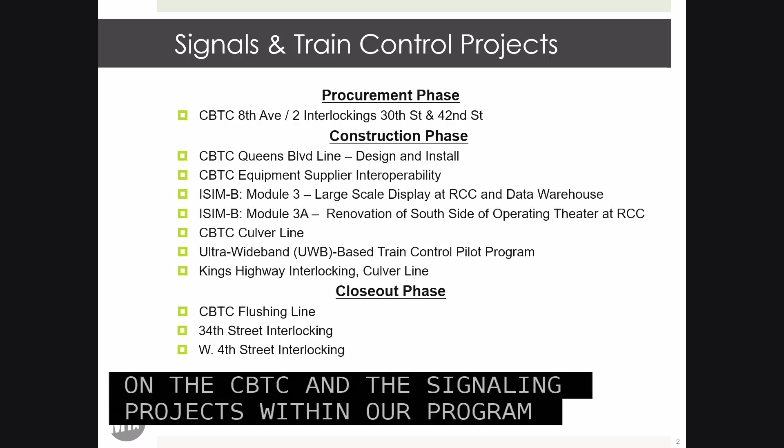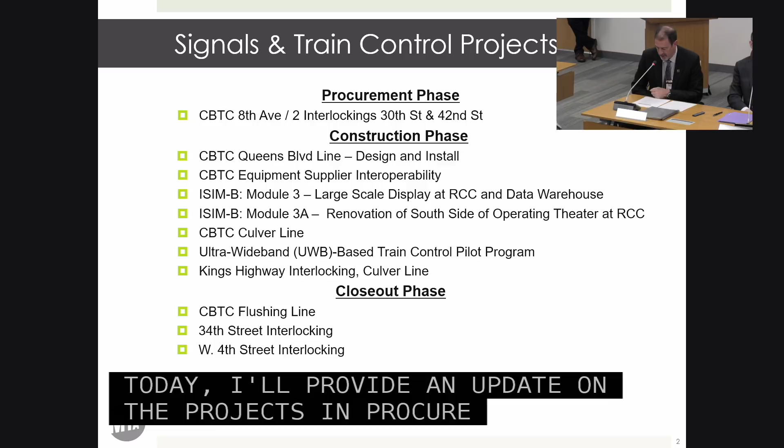Overall, we have 7 projects in design, 1 in procurement, 13 in construction, and 5 in closeout. Today I will provide an update on the project in procurement and 7 of the key projects in construction. Also an update on the Flushing line, which is now in the closeout phase.

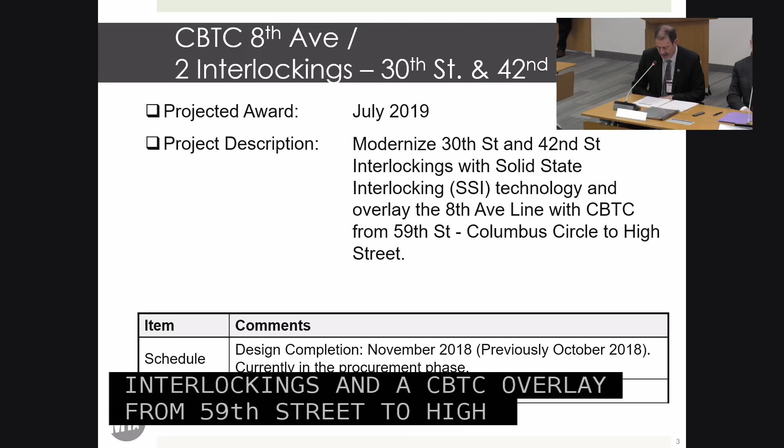The 8th Avenue contract is currently on the street with bids due in mid-July. The award is now targeted at August of 2019, and the completion date of this project is August of 2024. It consists of renewing 2 interlockings and a CBTC overlay from 59th Street to High Street. That's 6.5 route miles or 26.5 track miles, and 270 train units will also be equipped. This project is part of the Fast Forward plan and the first NYCT project that will use axle counters instead of track circuits.

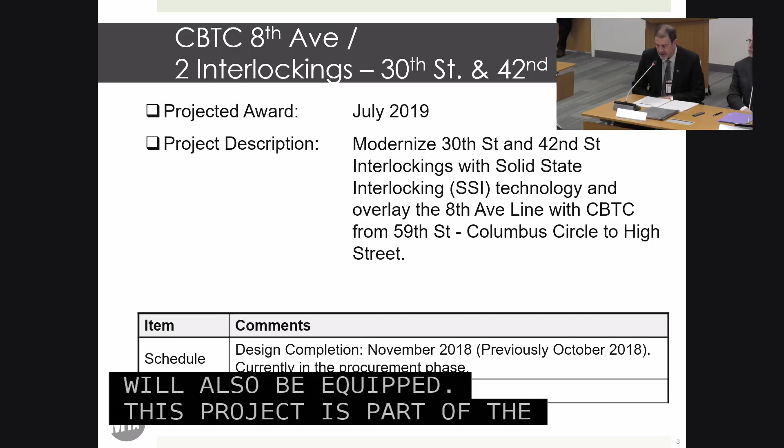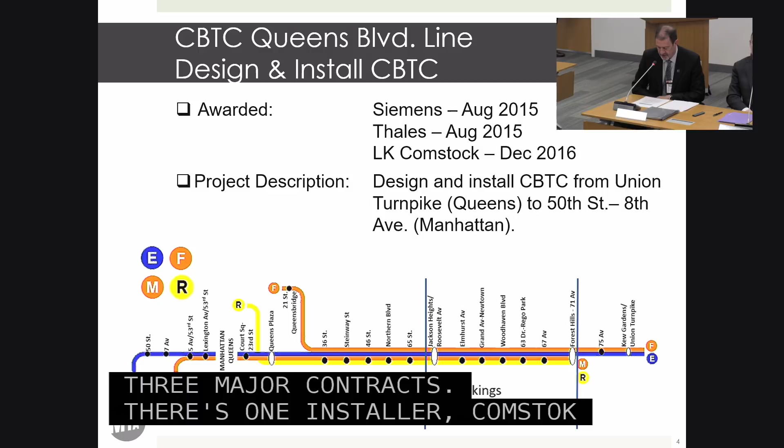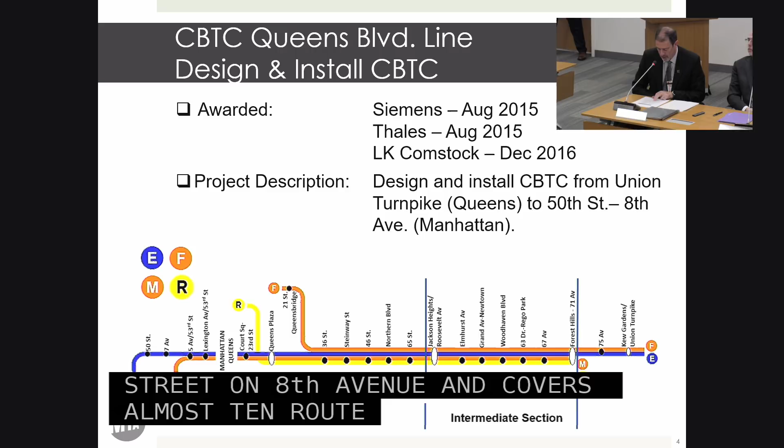Moving into the projects in construction, the Queens Boulevard line. This project is made up of 3 major contracts with 1 installer, Comstock, and 2 CBTC suppliers, Siemens and Thales, with Siemens being awarded 95% and Thales 5% of the CBTC portion. Geographically, the project runs from Union Turnpike to 50th Street on 8th Avenue and covers almost 10 route miles. It will effectively be put into service in 4 sections, with the intermediate section being first. That's shown on the drawing by the vertical lines in March of 2020.

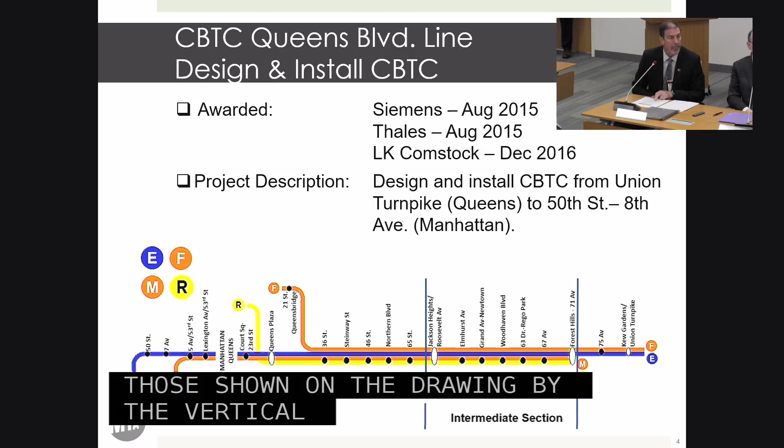Pete, Mr. Chairman, I think I may have made this comment before, but to make this map more geographically accurate, 50th Street should be after the curve, not before the curve on that map. Well, I will fix that next time. Thank you. Okay.

Hey, Pete, can you just tell the members of the board that are here and the public why two vendors on this project? Why both Siemens and Thales? Could you just spend a minute on that, if you would? Yeah, so because the network is so large, we need more than one signaling supplier. And to do that, their equipment has to work with each other's equipment. So we need a train that runs on any line to be able to work with different suppliers' equipment.

So this project is the first fully interoperable I2S project for NYCT, because Flushing was all Thales and Canarsie was all Siemens.

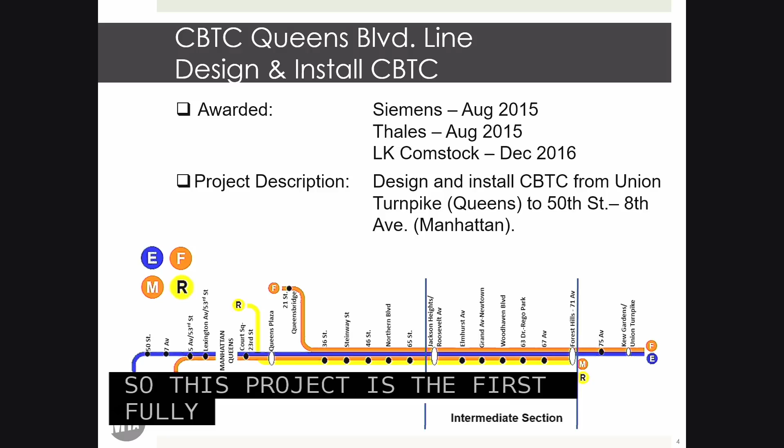So installation in recent months has accelerated significantly and now stands at 95% for the intermediate section and 37% for the full project, with all cables having been run for the entire project. The CBTC elements are at 58% complete.

The original completion dates are being aggressively targeted, but there is still a significant risk to both budget and schedule. We estimate that exposure to be in the region of 3 to 6 months.

The risk originated in 2017 with the interlocking projects utilizing every weekend and preventing the CBTC work piggybacking outages. TA labour resources were also severely limited, and a lot of flagging was required that wasn't available.

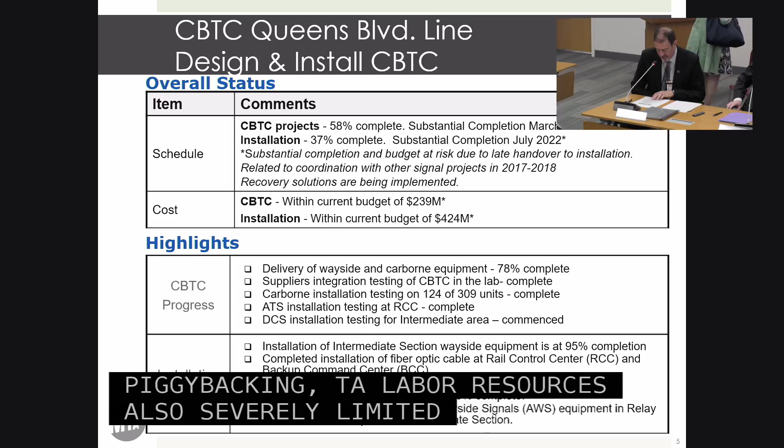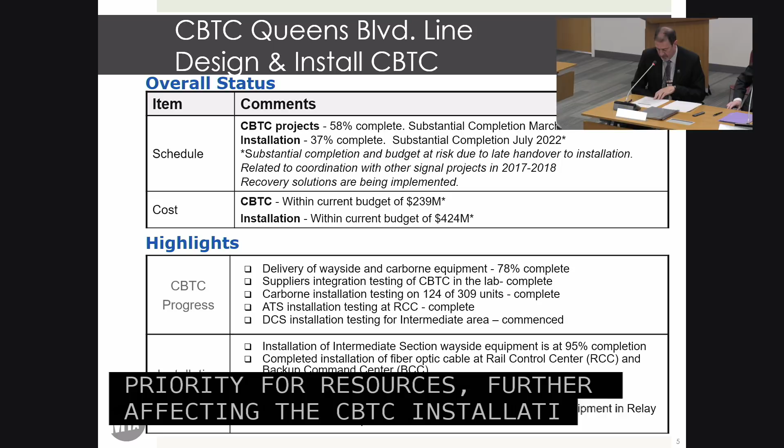The net result is that the intermediate section in service has moved out 6 months due to access conflicts, but as stated previously, many opportunities are being aggressively pursued to ensure that the other milestones are not affected.

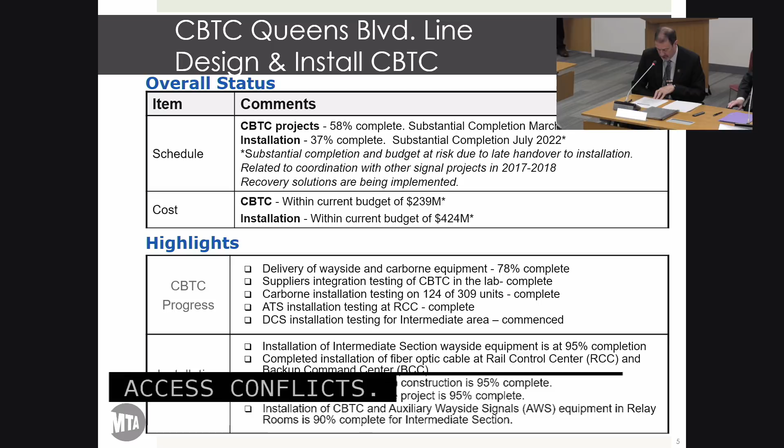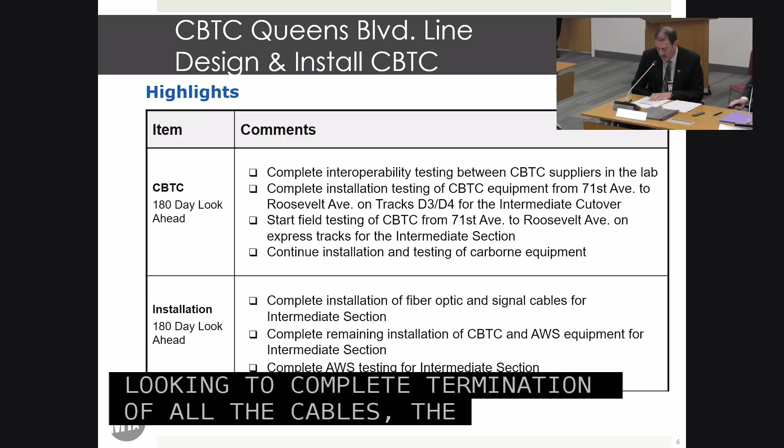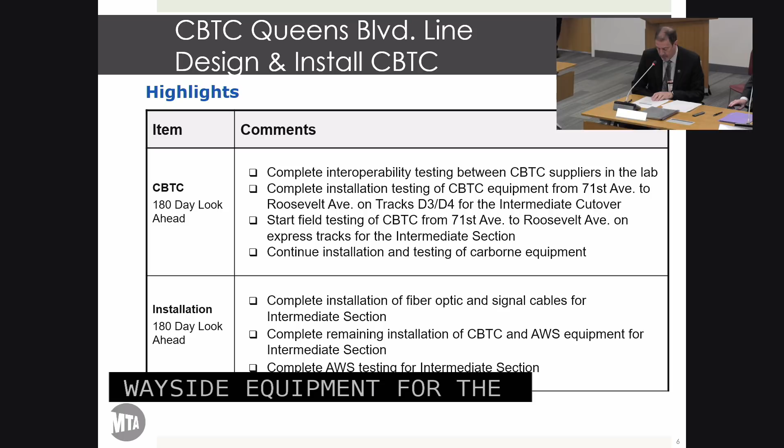In the next 6 months, we're looking to complete the termination of all the cables, the fibre, the auxiliary wayside equipment, and install the auxiliary wayside equipment for the intermediate section. In addition, field testing of CBTC for the intermediate section will get seriously underway, particularly with the DCS network, that will help prove all the trains, deal with the teething issues, and start to mature the fleet. We want to ensure there's high reliability from day one.

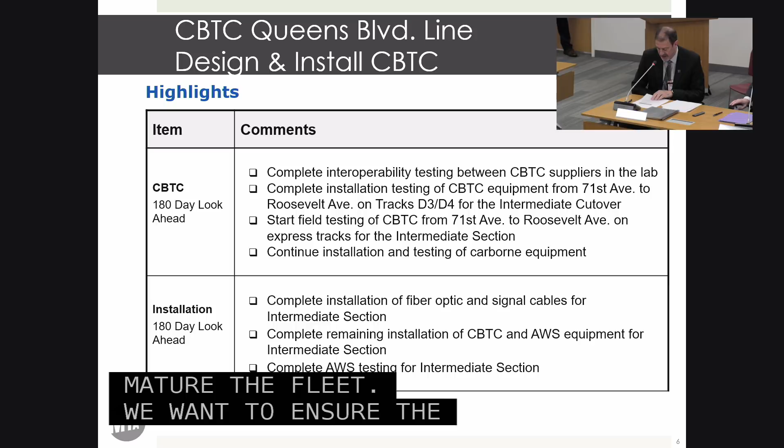Enough trains are already fitted out for the intermediate section, and work continues on the remainder.

CBTC I2S is a specification that suppliers have to adhere to, to make sure their equipment works with other suppliers' equipment. That testing on QBL is being completed between Siemens and Thales in April of this year. The training simulator arrived this month, in support of operator training, and that starts in September of this year. The software and the training materials are in progress.

All trains for the QBL line will be finished in June 2020, and as stated previously, the intermediate section trains are already available. I will say again that substantial completion is at risk due to those early delays, but the schedule with GOs, or the access, has been resolved. The schedule still remains very tight indeed.

Pete, can you quantify the schedule risk in months, please? I would say it's 3 to 6 months, but we do have opportunities that we're exploring, and we have significant commitments from all the major suppliers to come in on time. We've got a plan. President Byford has met with all the senior staff from the key players, and we're working through those opportunities.

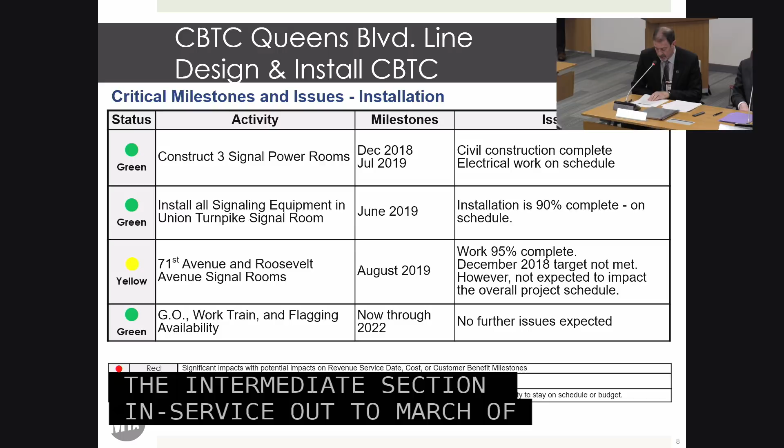Moving on to the qualification of the third supplier, Mitsubishi. Since September 2015, Mitsubishi have been developing and testing their new CBTC solution to become the third supplier to New York City for interoperable CBTC solutions. Once safety certified, they will be able to bid on contracts along with Siemens and Thales, thus providing more options and competition.

Pete, can we just stop there for a second? We've heard lots of discussion, appropriate discussion at meetings this month and in prior months about how in so many areas there's a duopoly of suppliers. Can you talk about the importance of qualifying Mitsubishi and the positive effects that may have going forward?

It's a very significant thing that we have to do, to get a third supplier qualified. We're also talking to a fourth supplier. Because the system is so large, there's no one supplier that can really handle the whole network, so we need multiple suppliers, and they need to work with each other. So it's very significant that we get Mitsubishi qualified. And all other things being equal, more competitors ought to result in more competitive pricing and terms. That's correct. And also an evening out of the workload, because it's quite a significant undertaking, even with two suppliers.

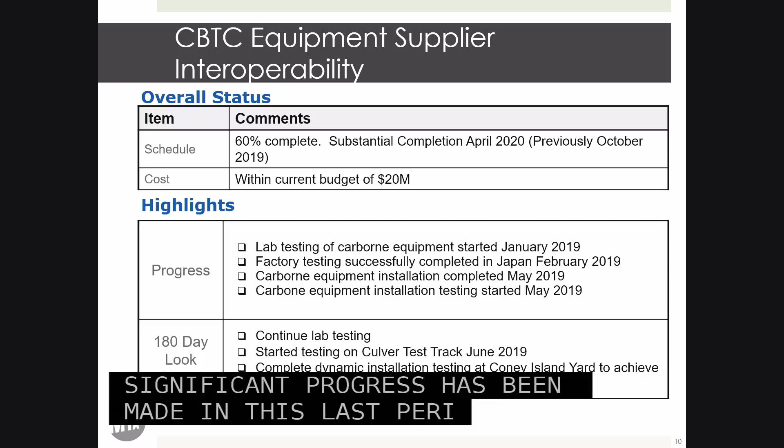This project started and was progressing slowly. However, substantial and significant progress has been made in this last period. The lab testing, the factory acceptance testing in Japan, and static testing of the carborne installation have all been completed since the end of last year. At Coney Island, a train has been run in both ATPM mode and automatic train operation. That is a very significant achievement.

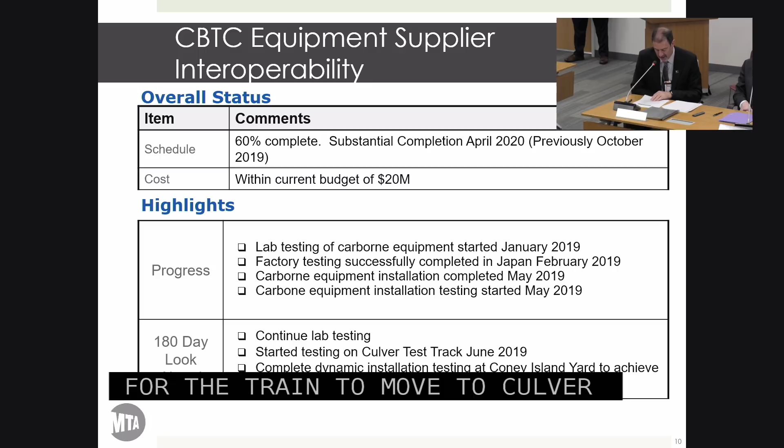Preparations are well underway for the train to move to Culver Test Track and for Mitsubishi to start interoperable tests with Siemens. In parallel, in the lab, Mitsubishi have completed integration tests and are now working through a suite of interoperable tests with the Siemens solution in a dedicated session over the next 3 weeks.

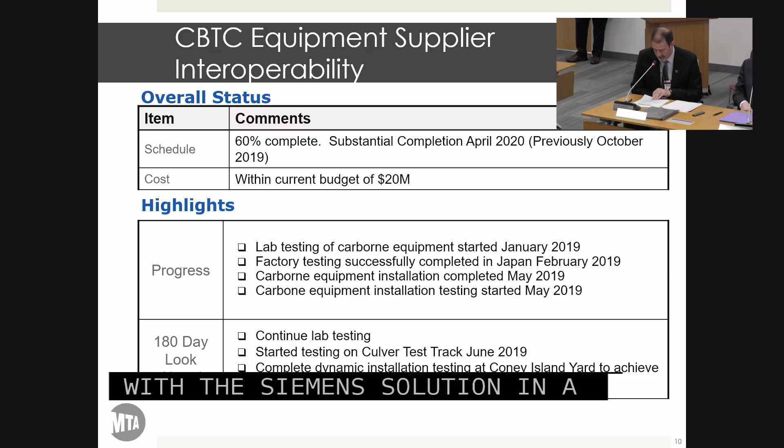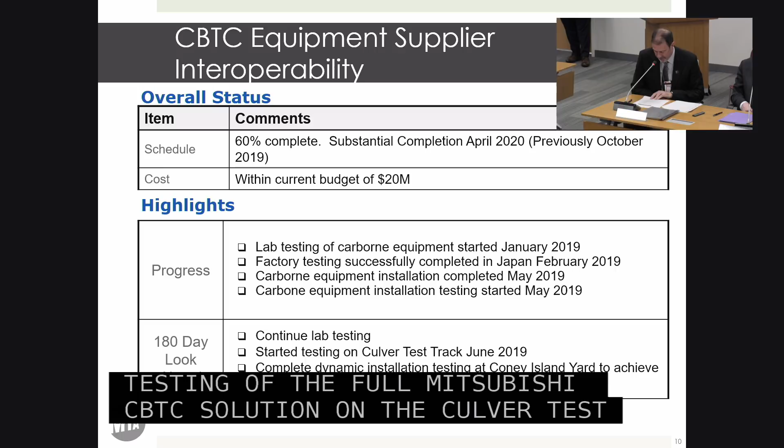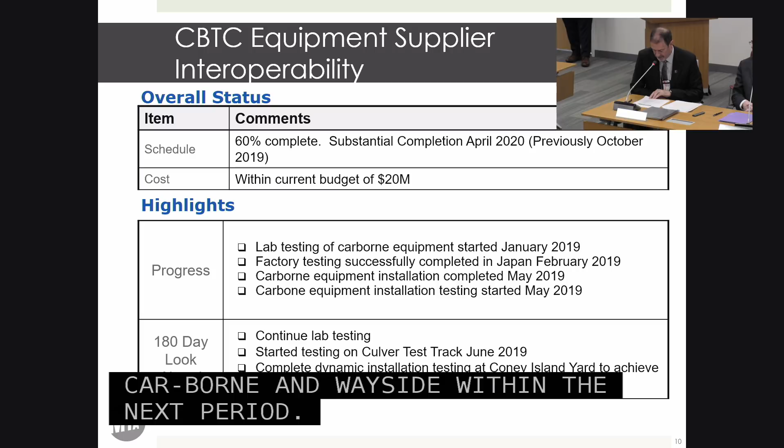The next 6 months will see the system testing in the lab complete, as well as dynamic testing of the full Mitsubishi CBTC solution on the Culver Test Track. This will allow pre-qualification of Mitsubishi carborne and wayside within the next period. Once they're pre-qualified, they'll be able to bid, and full safety certification will come early next year.

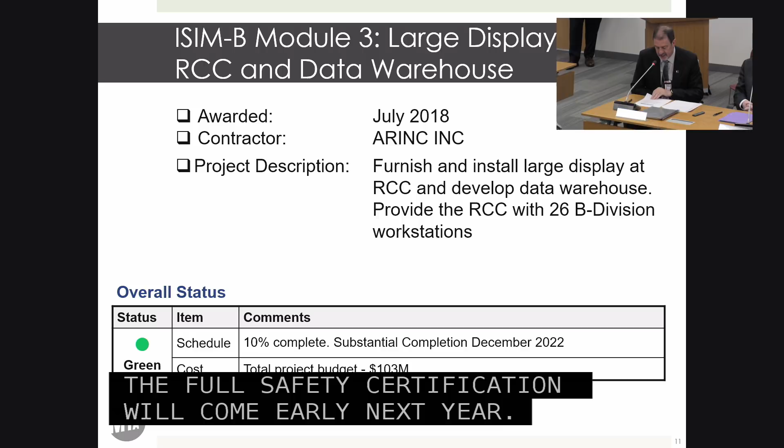The ISIM-B Module 3 project was awarded to ARINC in July 2018 and will see the installation of a large display, a data warehouse, and 26 B Division workstations in the RCC. This project is 10% complete, on schedule and on budget, with no significant issues.

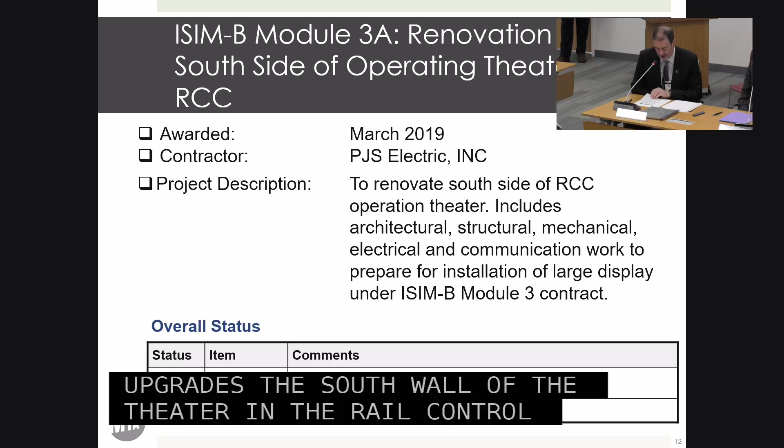Now to the ISIM-B Module 3A. This is a complementary project to Module 3, and it upgrades the south wall of the theatre in the Rail Control Centre. This project has just started, and there are no issues with scope, schedule, or budget.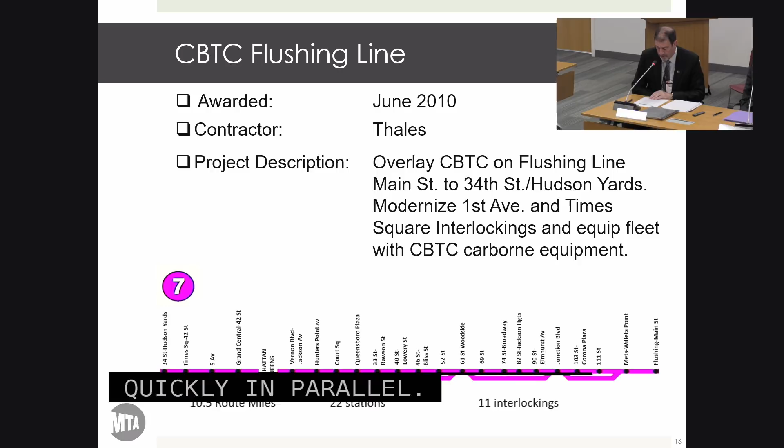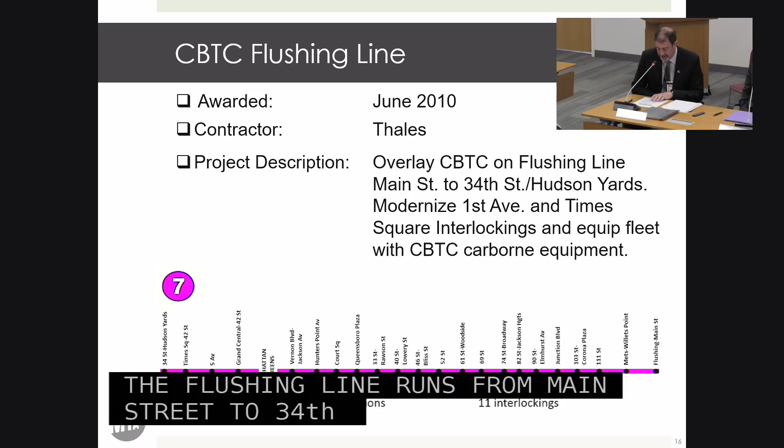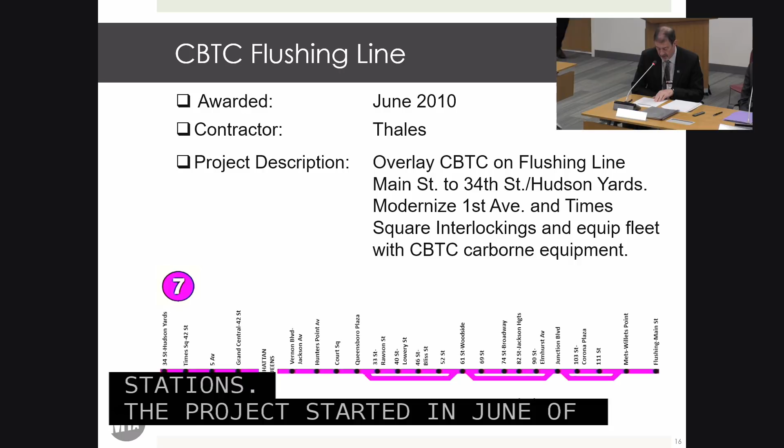Onto the Flushing Line, which is now in closeout. The Flushing Line runs from Main Street to 34th Street Hudson Yard, about 10.5 route miles, 18.5 track miles, and 22 stations. The project started in June 2010, with substantial completion in March 2019. There were many challenges, setbacks, and delays along the way. However, Flushing has now had 24/7 ATO operation available since early May, and the system is performing very reliably.

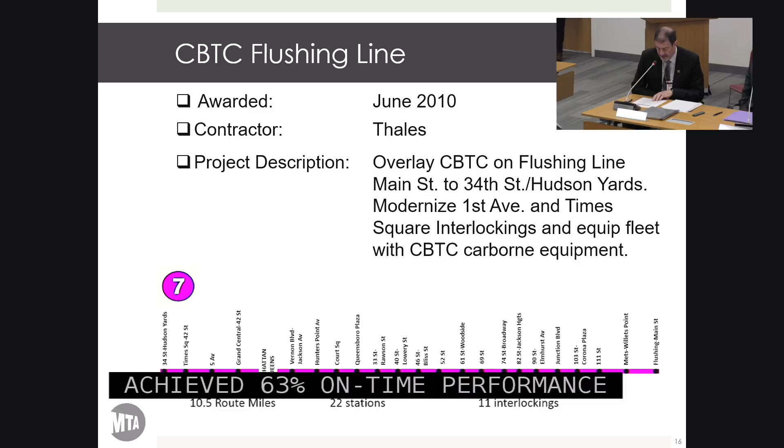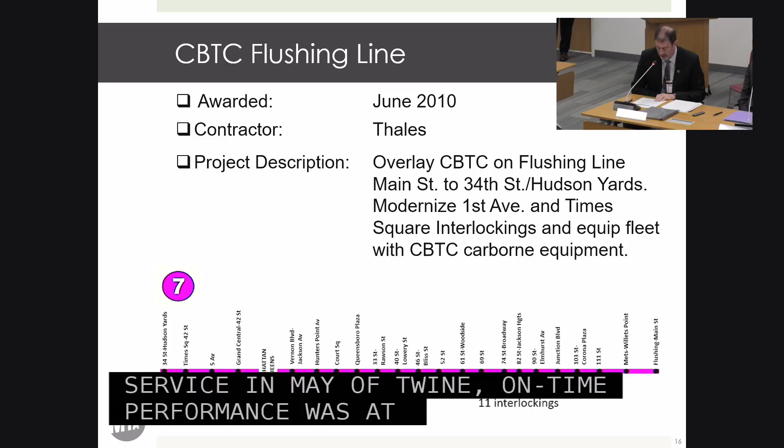In May 2018, Flushing achieved 63% on-time performance with 22 to 25 trains per hour. In its first month of ATO service in May 2019, on-time performance was at 90.6% with 29 trains per hour in both peaks — a significant improvement. A recent public survey of customers showed that they've definitely noticed an improvement.

Both Canarsie and Flushing are now fully CBTC. They are by far the best performing lines in the system, demonstrating that we have lots of improvements to look forward to as Fast Forward rolls out CBTC across the network at an unprecedented rate.

On Flushing, in the next 6 months, we will see all the punch list items completed, the remaining software releases before the end of July, and additionally, we will have removed all the old signaling equipment before the end of the year. These points were previously on the previous slide, and they're both on track.

I'm wondering, and I'm hopeful, that the ultra-wideband test is going to be successful and that it will be a viable alternative to installing CBTC throughout the system, because it can be done in a fraction of the time, a fraction of the cost, obviously.

When do you think we will know whether UWB is a success and can be made further throughout the system? I think towards the end of the fall, we will know once all the data collection tests are done, and we've done the functional testing. We will know that functionally it's possible to use as part of a solution, and then by first quarter, possibly second quarter next year, it will be fully safety certified for use. So sometime in 2020, we'll have a viable answer to this.

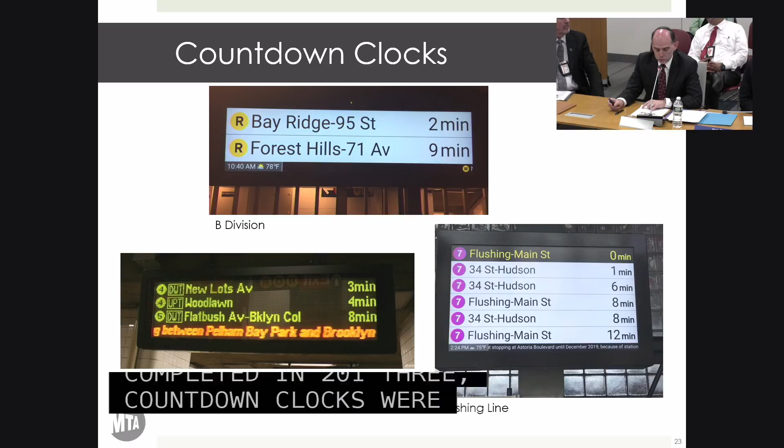Before I update the committee on specific projects, I'd like to provide a brief overview of some of the projects managed by the Systems and Security Program. The project to install countdown clocks on all A Division stations was completed in 2013. Countdown clocks were installed in the rest of the system, the B Division, using new different technology in 2018, and the project was completed 3 months ahead of schedule. Starting in the lower left and moving clockwise, you can see the evolution of the countdown clocks from the old technology to the newer technology.

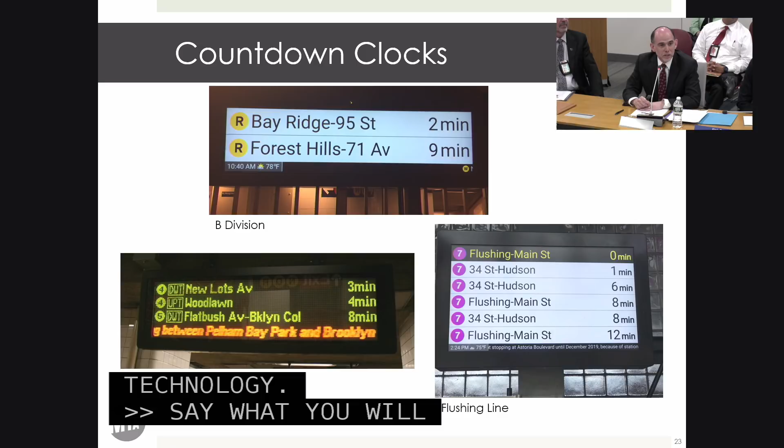Say what you will about old versus new, the A Division countdown clocks, I think, are the most accurate, even though they look old. They are the most accurate because their data source is the ATS system, as you well know, Commissioner.

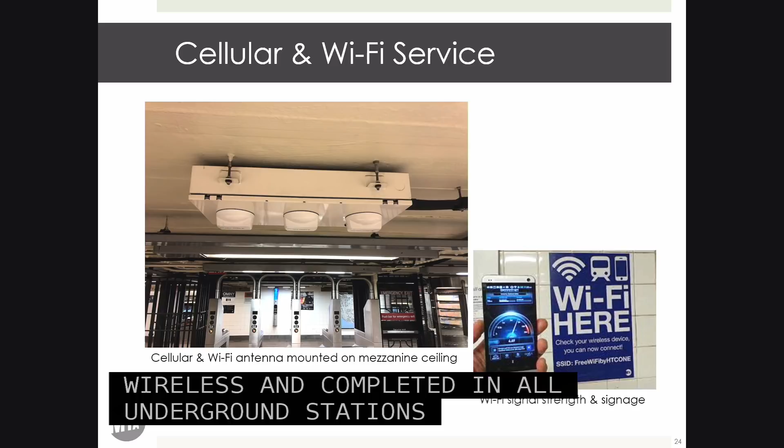Cellular service and WiFi for our customers was installed through a partnership with Transit Wireless and completed in all underground stations in 2017, one year ahead of schedule. New public address systems were completed in 2018 at 91 B Division stations, which had no public address capability. All subway stations now have working public address systems. This was a key component of our customer commitment, and we met it.

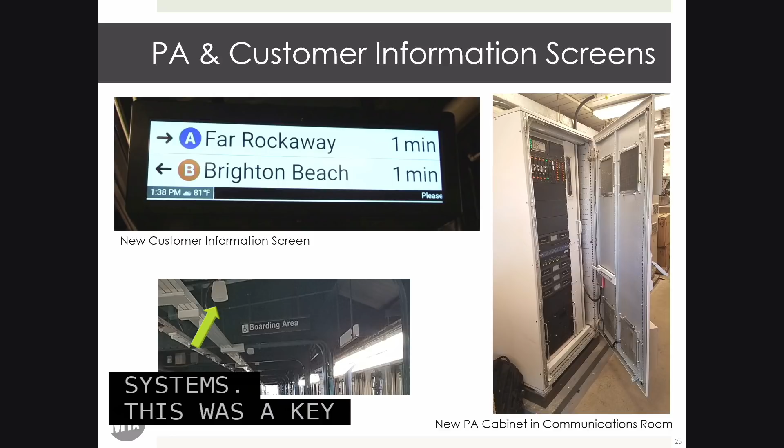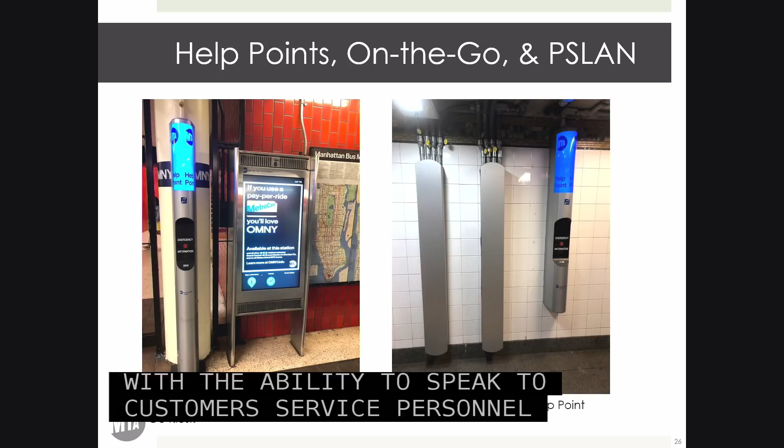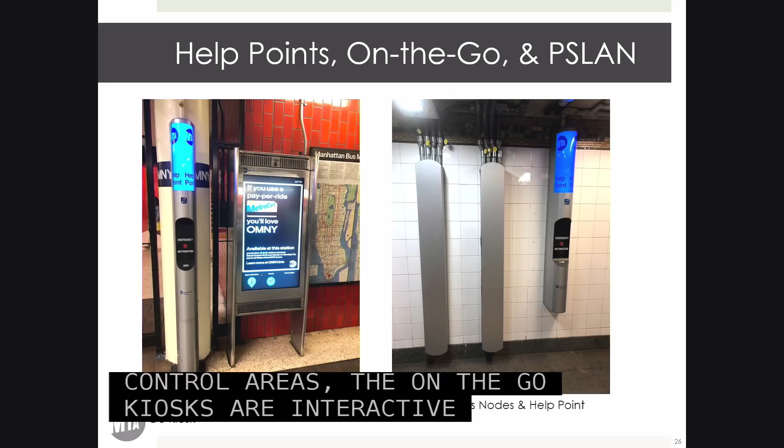Help points provide our customers with the ability to speak to customer service personnel in the Travel Information Center, the station agent, and personnel in the RCC. Help points are installed on platforms, mezzanines, and part-time control areas. The on-the-go kiosks are interactive information screens, which provide real-time trip planning, service status and updates, train arrival information, and public service messages.

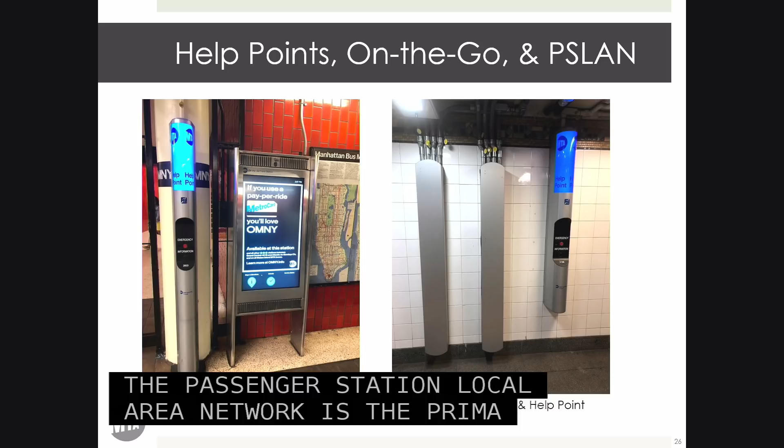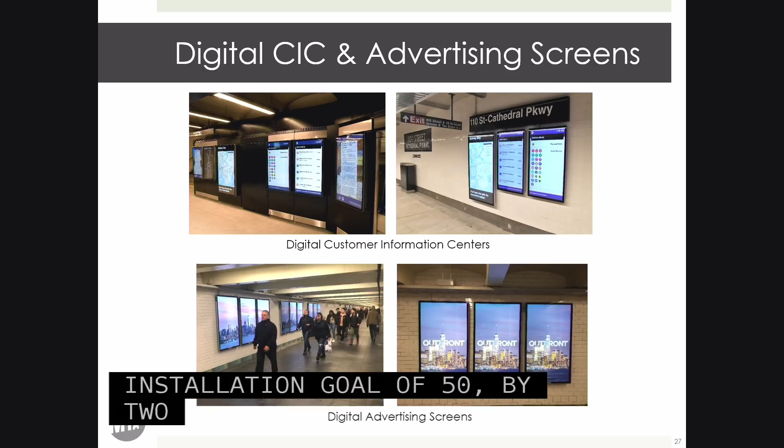The passenger station local area network is the primary station communications network used to transmit digital information to and from the stations, including OMNY. Digital customer information centers are now installed in 115 stations, and advertising screens are active in 96 of those stations. In 2018, we exceeded our installation goal of 50 by 2 stations. The 2019 goal is 100 stations, of which 63 are already in service.

Go further, and I'm sure you're aware of this: the OUTFRONT digital screens you just showed, where they have the countdown clocks, when they cycle through to a countdown clock, they don't necessarily match the countdown clocks that are hanging up. They are sometimes a minute off of each other.

I'll speak to our IT people and see what the situation is. Thank you.

We've installed electronic security systems, including CCTV at fare control areas and throughout key stations, as well as access control systems at under-river tubes. I will now provide an update on 3 specific projects: the Flushing Line Public Address System, the Bus Radio System, and the new Bus Command Center.

The Flushing Line Public Address System modernization was awarded to TC Electric in December 2016. This project is installing a new digital PA system and LCD customer information screens on the Flushing Line. Customer service personnel in the Rail Control Center will be able to make announcements at any or all of the stations on the line. The system will also interface to the Flushing Line Automatic Train Supervision System to display train arrival time at all stations on the line.

Substantial completion is scheduled for July 2019. The 4-month delay is due to the modification of existing HVAC equipment at 15 communications rooms in order to maximize space and allow a safer work environment for future upgrades in the rooms.

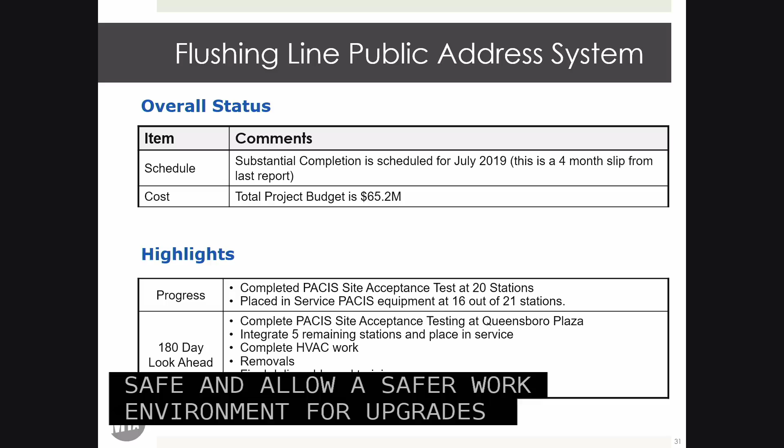We have already completed testing at 20 out of 21 stations and placed 16 of those in service. Over the next 6 months, we will complete testing and place all remaining stations in service.

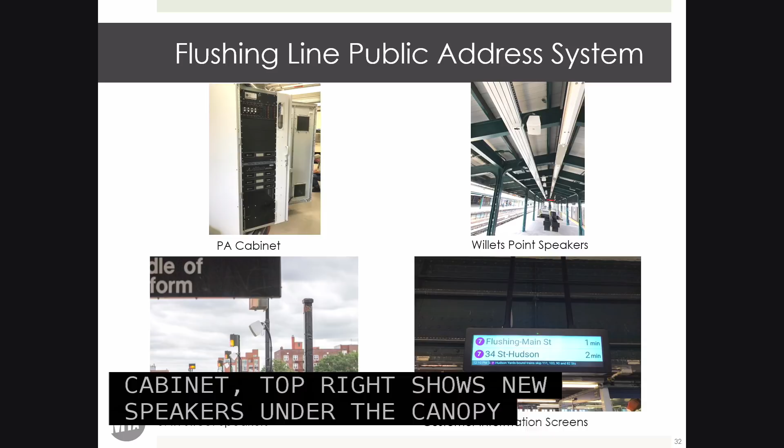Here are some photos showing work recently completed. The top left is a new PA cabinet. The top right shows new speakers installed under the canopy at Mets-Willets Point Station. The bottom left shows new speakers installed on lighting poles at 69th Street, and the bottom right shows a new LCD customer information screen.

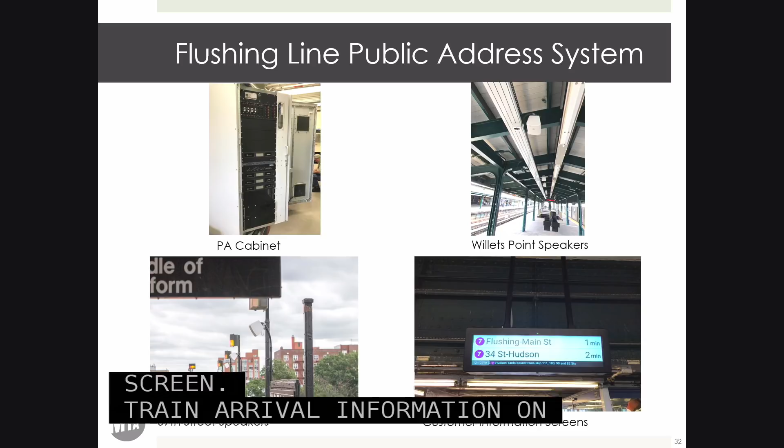Train arrival information on the Flushing line is currently being provided using the Beacon train tracking system, just like the rest of the B division. When the new Flushing line ATS system is fully operational, it will be used to generate accurate real-time train arrival information.

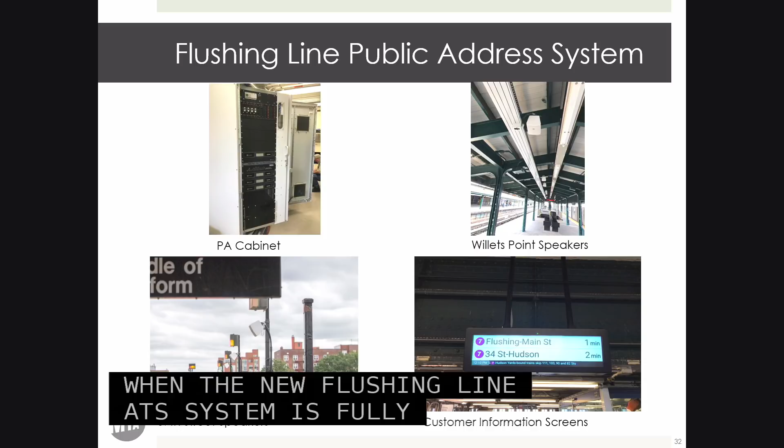The bus radio system project will install a new digital bus radio system for the Department of Buses and MTA Bus. The project was awarded to Parsons Transportation Group in March 2016. This contract will also furnish and install computer-aided dispatch equipment, network equipment, telephone, video, and audio systems. The contractor's latest preliminary schedule is showing a 170-day delay.

This schedule has not yet been accepted by New York City Transit, and we are working with the contractor to mitigate any possible delays to the project's completion.

Construction activities at base station sites are progressing. The system integration test critical milestone was successfully completed. Over the next several months, we will complete construction at Todt Hill and Castleton Depot in Staten Island. Outfitting the bus command center in Brooklyn will also continue.

The 200 bus pilot has been impacted by the FAA requirement to shift the location of the Todt Hill antenna tower within the approved site. Site approval has been secured from the FAA and DoD, but we are still awaiting FAA approval of the site clearing plan to begin construction. This has led to a delay in the 200 bus pilot from August to October and pushed the outfitting of all remaining buses back as well.

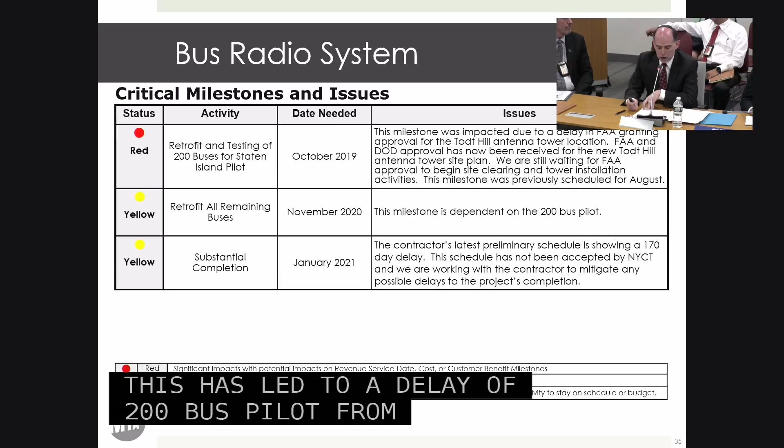Hey Mark, is there anything in hindsight, anything we could have done to shorten the FAA project or to save some time on this piece?

What we didn't do and what we couldn't do was pick the exact footprint on the site that the contractor would need because of the RFP process. Once they determined what they needed was really the first opportunity we could go to the FAA for site approval of that specific location within their overall site. We had approval from them to be on the site prior to the release of the RFP, but their first concern was our monopole. They wanted to lower the height of our monopole. We couldn't do that because it wouldn't provide coverage.

If you know the geography of Staten Island, it's sort of hilly in certain areas. And they forced us to relocate within the overall site to a different footprint. In order to gain the elevation we needed, we had to change the tower design from a monopole to a lattice tower. That created some site clearing issues, which we're now in the process of resolving.

We did reach out, though, to our partners at the FTA, and we've asked Steve Goodman from the FTA. He's reached out on our behalf to the FAA, and we're awaiting a quick resolution, so hopefully we'll get that soon. Thank you.

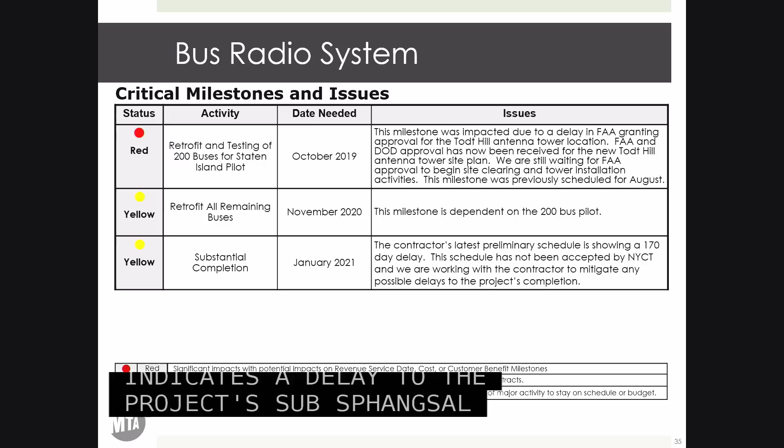As mentioned previously, the contractor schedule indicates a delay to the project's substantial completion. Site installations continue as a risk to the project schedule. We are working with the contractor to develop a mitigation plan to address the risks and site delays. We are meeting with Parsons' president and senior leadership team to secure commitment to mitigate the delay and complete the project as scheduled. That meeting will be held with our senior vice president as well as with Andy, the president of the authority.

Here are some photos of work in progress and completed to date: the shelter and monopole at Eltingville Depot, the network cabinets already installed at the RCC, the shelter and monopole at 38th Street Yard, and the monopole at Charleston Depot on Staten Island.

Construction of a new regional bus command center for New York City Transit and MTA Bus was awarded to MPCC Corp in June 2015. Substantial completion was declared on June 17, 2019. The delay was due primarily to an unforeseen subsurface duct bank that obstructed the path of the sewer discharge line from the building to the street sewer main. This necessitated redesign of the sewer connection to an alternate main, which required testing, approvals, and permitting by the New York City Department of Environmental Protection.

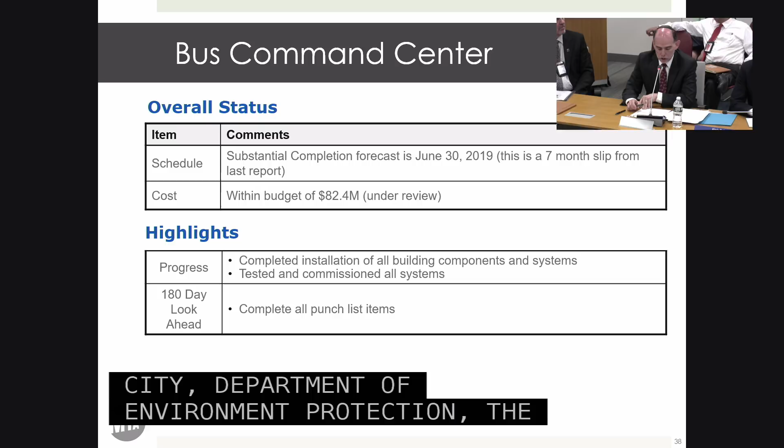As previously mentioned, substantial completion was declared on June 17th.

On the cost, we expect the overrun to be, what, $3 million to $4 million, a number like that? Approximately, yes.

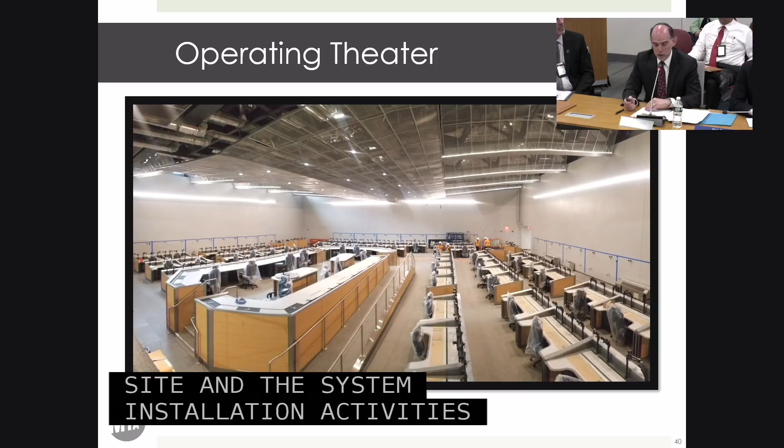There has been no impact to the bus radio system contractor's access to the site, and the system installation activities are progressing. Here you can see a photo of the operating theater. It has a total of 75 consoles. 15 of them are management consoles, and they're in the raised area in the middle.

Joe, just to be clear, can you tell the board and members of the public what kind of theater this is, or what kind of theater it's not? It's not a movie theater. It's the operating theater where bus service management personnel will manage all bus service operations throughout all 5 boroughs.

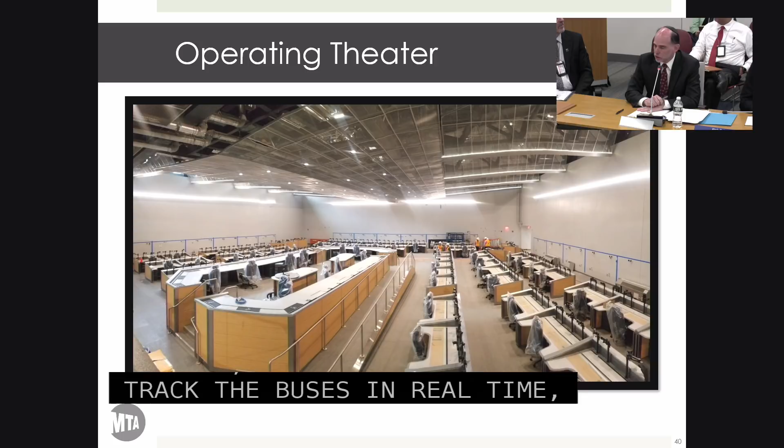Around the outside of the theater are the operator consoles. They'll be able to track the buses in real time, address instances of bus bunching, or smooth out service delivery. Management supervisors are right in the middle. Along the outside, there will be large screens so they can look at real-time traffic conditions as well as bus locations in order to improve the delivery of bus service throughout the 5 boroughs.

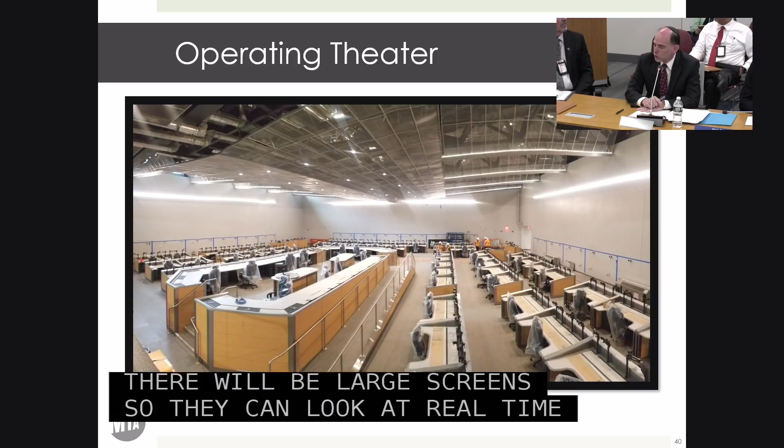That's great. Andy, can you speak to the customer benefits of this investment? Absolutely. I think this is a game changer, because at the moment we have these disparate command posts, or disparate command rooms, in different depots.

I was just at Charleston on Friday having a look at the room there. This will mean that for the first time we have a proper overview, more than anything we've ever had, of exactly where our vehicles are. We will get real-time information about any route blockages, and we'll be able to liaise in real-time with the police and the city, for example if there was a parade and what we need to do. We'll be able to direct, in much more real-time, both the operation of bus services, so you can avoid bunching and gapping and take proactive action, but also pump out information to customers. We can monitor what's going on Twitter. This will be the bus equivalent of the RCC. I'm really looking forward to getting in there.

You may have had a little powwow with Ronnie when we mentioned the issues we were having with the radio contractor. Tomorrow I'm meeting with their CEO. We're really going to look them in the eyes and say, you need to claw this back, because we don't want that screwing up our migration to this beautiful new facility. Good, thank you. Keep us posted on that.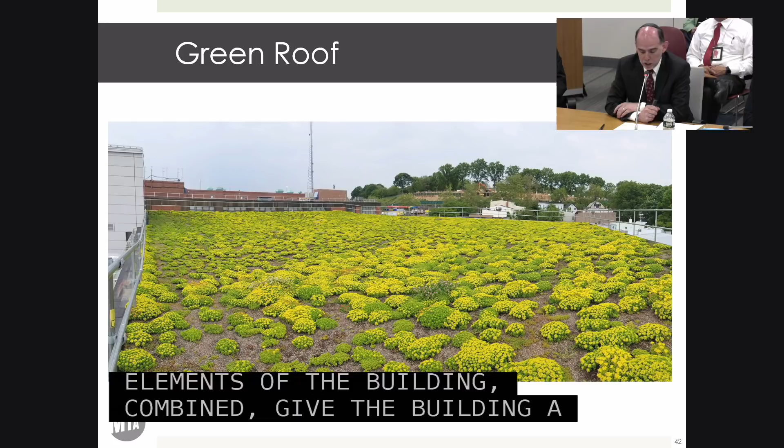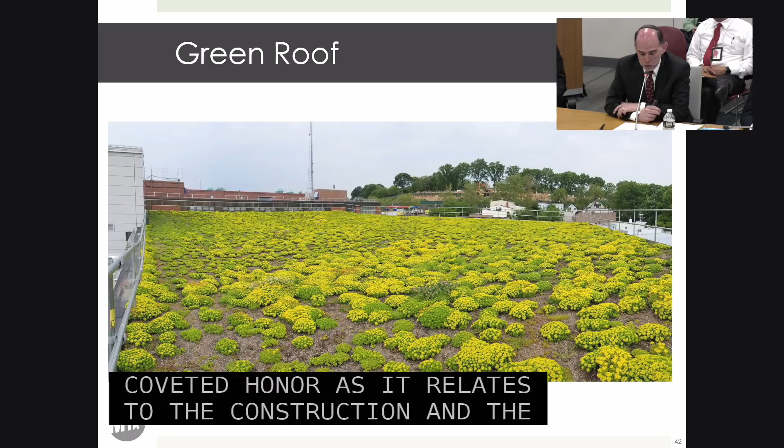LEED stands for Leadership in Energy and Environmental Design. It's a very prestigious and coveted honor as it relates to the construction and occupancy of buildings, especially important in New York, as New York City embarks on a whole effort over the next several years regarding the effects of climate change and securing the city against those effects. This concludes my presentation. I'll take any questions.

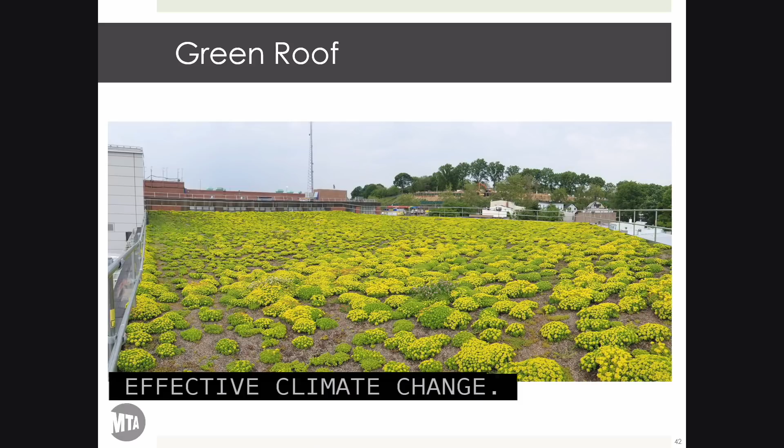I had a chance to go out there about a week or so ago, and it's spectacular. And an investment like this is an investment in that neighborhood as well.

I don't think they're marked. I'll get back to you.

IEC, Hassan, good afternoon. The IEC report for the Bus Radio System, or BRS project, with observations and recommendations, can be found on page 63 of the CPOC book. We have verified that the current budget of $280 million is sufficient to complete the project at current estimated completion, or EAC. Concerning the schedule, little progress has been made since our November 2018 report, and the IEC review of contractors' schedule updates shows a month-for-month delay since then. The IEC forecasts a delay of at least 6 months to substantial completion if progress on the project is not accelerated. The IEC recommends the following.

With respect to the schedule, a recovery plan is needed to resolve outstanding issues so substantial completion is not further delayed. With respect to testing, a master defect list is needed to track all variances and their dispositions, starting from factory acceptance testing of all subsystems and throughout the project. Regarding the system rollout, a clear process is needed to safely implement any hardware, software, and configuration changes to the live system. Once the system is in operational use, all changes must be approved, tested, and verified in the test environment before system-wide implementation.